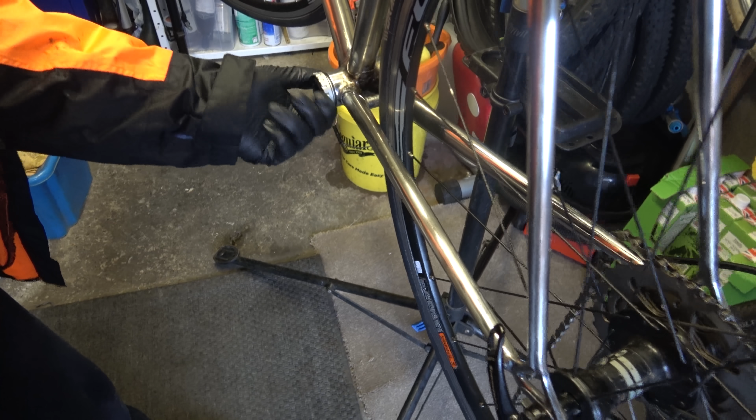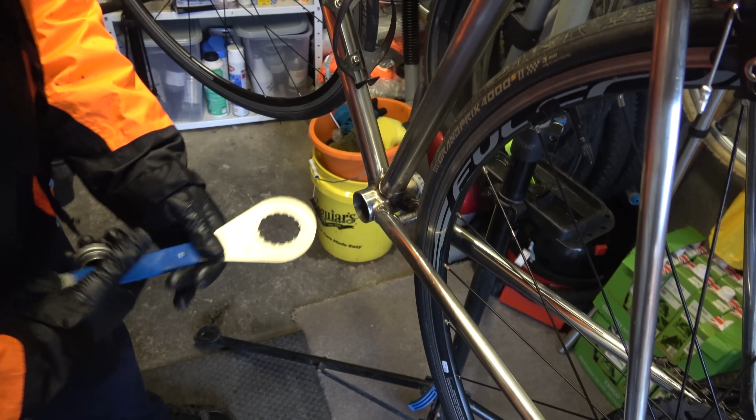We are removing the old bottom bracket on this rather nice Pinarello frame. I just bought it from eBay. A bloke from Italy sent me it. It took 3 weeks to get here because of the COVID restrictions. Oh dear. And that was £340 just for the frame, and I've just built it up to 105 because that's all I had. I stripped a mountain bike, took the bars and everything off that and put it all on here. Just to get it going, you know.

I know it should have Campagnolo, but I prefer Shimano anyway, because the bits are more accessible, you know what I mean? Yeah, I think the way that I look at Shimano is it's been engineered, it's almost robotic, whereas Campag is more a piece of art rather than engineering. But there we go. Anyway, I don't know where the heck I got these bearings from. They're just in my bag of bits.

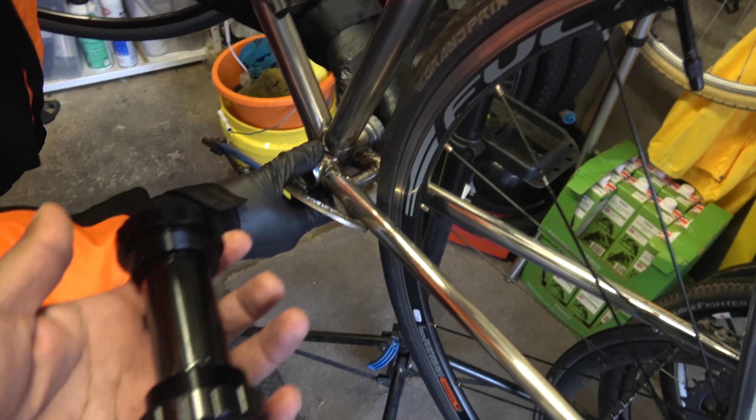So on an Italian bottom bracket, both sides are right-hand thread. That's right. So in theory, it doesn't actually matter which way you put this in. Do you want me to slide her in? Well, if you pull that out, there's two halves to this, which is a tight fit. So I'll put that on the other side. So you might have to thread it like half a turn. There is grease on them threads. Okay. I don't want to cross thread them. Is it in?

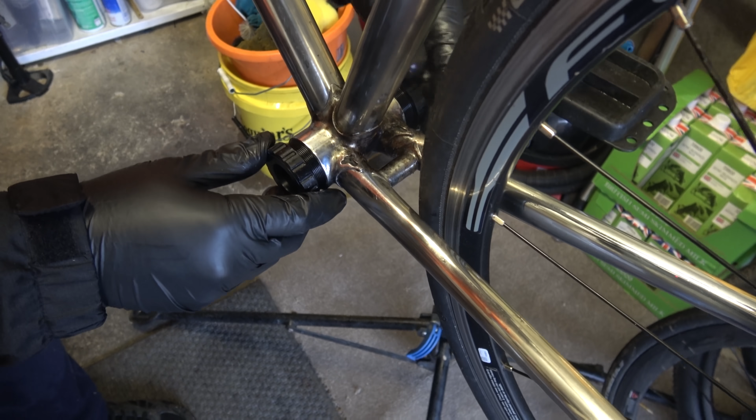Yeah. Which way did I go on that side? Clockwise. Let me just try it on this side. Does it matter? Alright, don't screw that in all the way. Put the other end in, because as you tighten it... So that's go that way, yeah? That one needs to go the other way. Yeah, that's got it. So it doesn't actually matter which side you put these in. Screw them together, it should just tighten up. It'll get tight as the sleeves cross. Yeah, it's tight now. Okay.

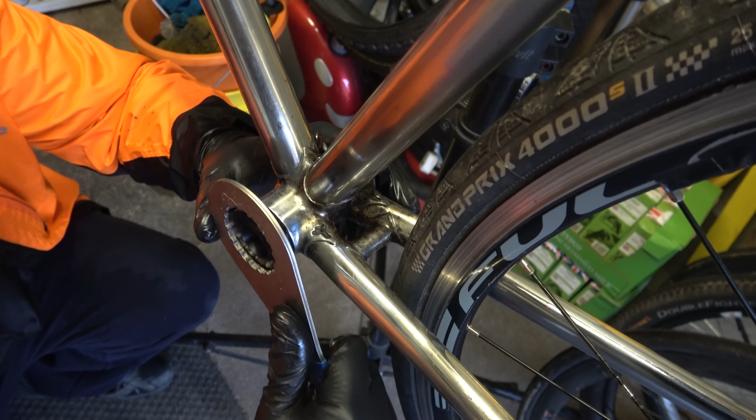And then you might just have to stop and then tighten this end. Ooh. So just have to give it a go. Might have to slacken the other end off. How's it going? Okay. So once it's in, that's lining it up. Why wouldn't you use a spacer then? Because if you've got the spacer on, you move the bearing to the wrong place, and the number of threads that engage won't be that high. Well, I don't think that axle will work then, will it? I'll take it away and have a look.

But my Colnago, the bottom bracket on that, it's just like a normal. It's Italian thread, but it's a different shell width, if you know what I mean. Yeah. That's why I thought, well. Okay, you're getting up to the near to the point where... That's nip that. And then just nip that off. Did I go that one way? Is it towards the back? Towards upwards. No, other way. That's it. Yeah, so that's why I thought I'd just get the same bottom bracket, because it's Italian.

That's going out, that's the wrong way. Oh, sorry. Wrong way, Mr. Hambini. Clockwise. It's because it's back to front. Yeah. So just for clarity, for viewers, it's clockwise both ends. Might help if you stand on the right side of the bike. Yeah, that might help. And that's it. I think just nip it. Yeah, don't want to do too much on it. No, well, that's a little nip there.

The only thing with this is you're better off when you put this on to put a bit of thread lock or something like that. It has got grease in. Yeah, the thread lock would be on that side, would need it more than that side because it might unwind itself. Because it's the opposite thread. Yeah, like I say. So once that's done, we just need to put the crank in.

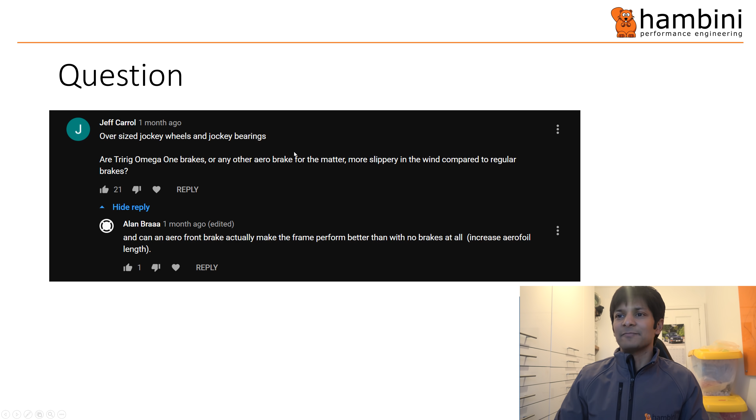Right, the first question came from Jeff. Did you see that? Did you fucking see that? In fact, is my pen working? Fuck, where's the pen? Shit, where is the pen? Fuck. Right. Pen. Oh, fucking hell. Right, people actually get off on watching me be shit on PowerPoint. Anyway,

Jeff Carrol asked, are oversized jockey wheels and jockey bearings worth it? And are Tri-Rig Omega brakes or any other aero brake for that matter more slippery in the wind compared to regular brakes? And then Alan Braaa replied, can an aero front brake actually make the frame perform better than with no brakes at all? Increase aerofoil length. Right, so I'll answer those questions on the next page.

So, oversized jockey wheels and bearings. Now, I wouldn't say it's a hot topic, but one of the prime protagonists of this is Ceramic Speed. And they sort of go on about oversized jockey wheels reducing drag, and the gains from it. So I can really speak to you from my opinion on the bearing front.

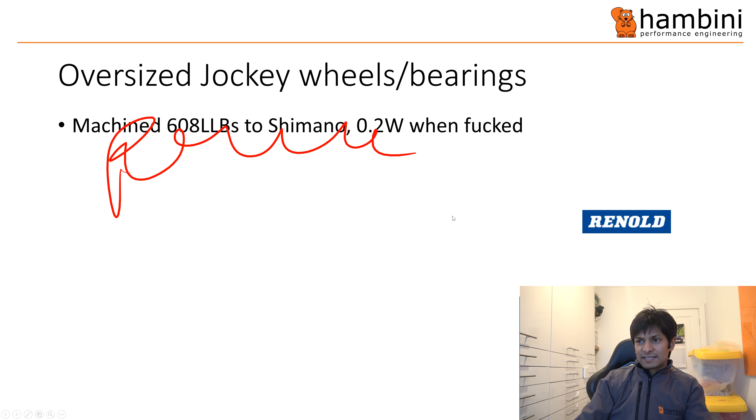So if you... fuck, I went to town with this PowerPoint. I've just defaced that. Someone said it was Control E to get rid of everything. Oh fucking hell, yeah. Control P for the pen. Yes, I remembered that. Might help that I put a piece of paper below with all that shit on, but anyway, with those shortcuts, which I forgot to read earlier on.

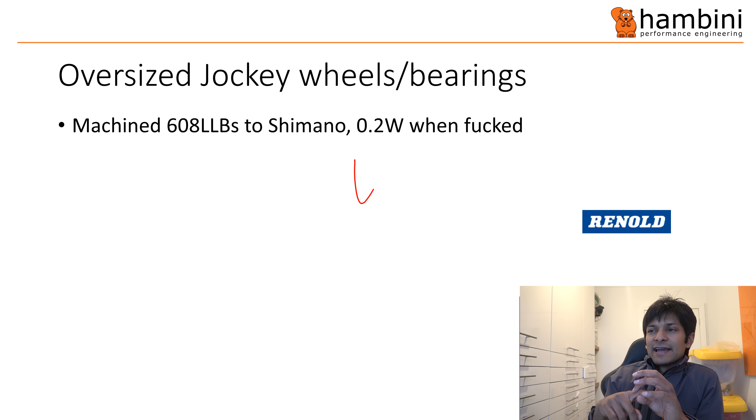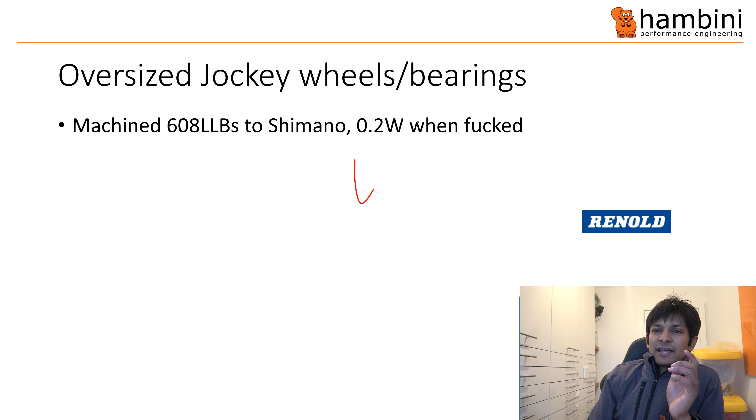Right, if you fit a set of 608 LLBs by NTN into Shimano jockey wheels, you will save about 0.2 watts when those bearings are fucked. Now, I've never done it on a brand new set, so you probably get maybe half that. So the saving will be 0.1 watts. That is just the bearing drag. Now, if you were to go to a Ceramic Speed oversized pulley wheel, then you are into what is known as chain angle theorem. So if I draw, where's the pen?

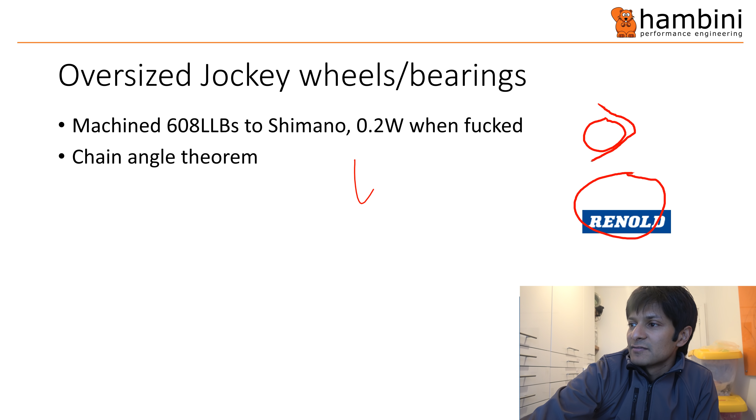If that's a normal wheel and that's an oversized wheel, the angle of the chain across the normal pulley wheel is that. The angle of the chain across the massive pulley wheel is that. So the overall total angle is the same, but the individual angle that the chain links have to pass through is diminished. And that apparently gives you a reduction in power.

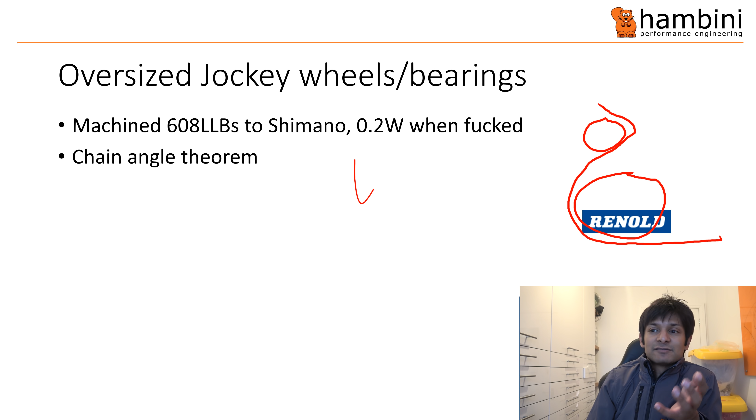Now, I don't know the basics behind this, so I went and emailed one of my mates who works at Renold. I think the guy was Swiss. Anyway, they're based in Manchester and they make chains. So they're quite a prominent chain manufacturer. So industrial usage, chains, Renold.

Now, he said, a 19 tooth versus a 12 tooth on a 1/2 inch pitch gives you 0.02 newton meters of torque reduction. And he also caveated that with, that's not measured, that's a calculated measurement. They've never actually done it, so there may be some error margin in there. That is, if you were pedaling at 80 RPM, I don't know, 53 tooth chainring, you will be looking at about 0.45 watts. So that is the drag reduction saving, 0.45 watts.

However, you also have the additional weight of the extra chain links, and the rear mech is further dangling into the wind. Now, whether it's more or less than 0.45 watts, I don't think it's ever been measured, but my opinion is it'll be more. So your net loss is worse because of the aero drag, the chain weight, all of that. It's small amounts, but it's small amounts that are costing you $500. So why do you want a small amount when it costs you that, and it possibly could make you slower? And I imagine the riding position will also have an effect on how much drag you have, and also your choice of rear wheel.

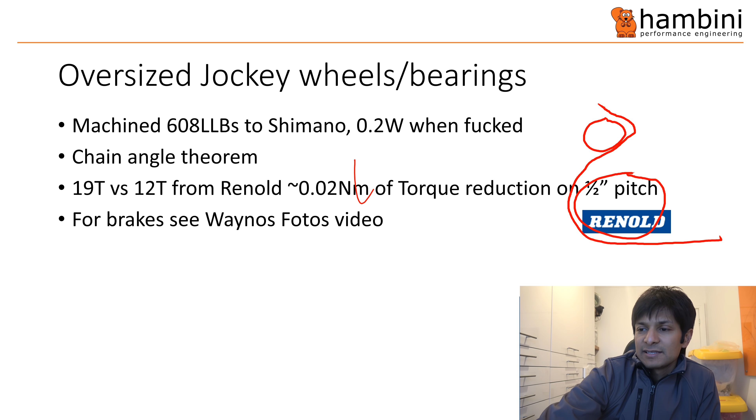Right, in terms of the brakes, if you haven't seen the video by Waynos Fotos, then go and have a look at that about disc brakes and rim brakes. Now, Alan's question was, does the brake increase the aerofoil length? So basically what he's saying is, if this is the front wheel, the fork comes up like that, and the brake sits sort of here, and then the frame comes round. Wow, that is a fucking good drawing. Right, the brake sits there. So he's saying, will that increase the length?

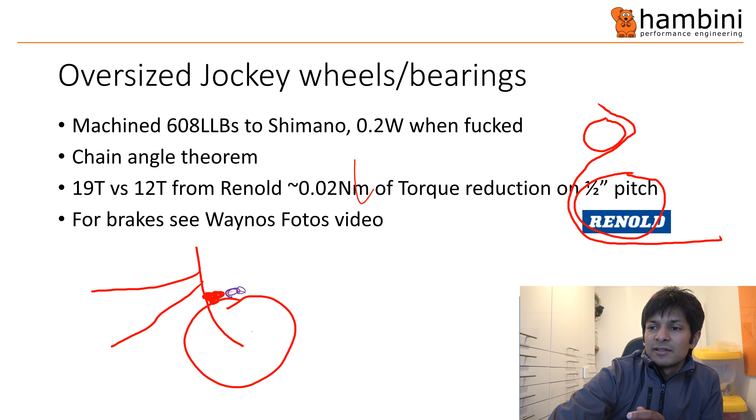Well, it will increase the length because you will have an addition to the fork, but the air in this region... Can I change the colour? Ink colour. Let's pick purple. The air coming off the top of the wheel is basically doing that. So you're in this region where the airflow hitting it is not uniform, it's swirling all over the place, and your gain is not going to be that high. Okay.

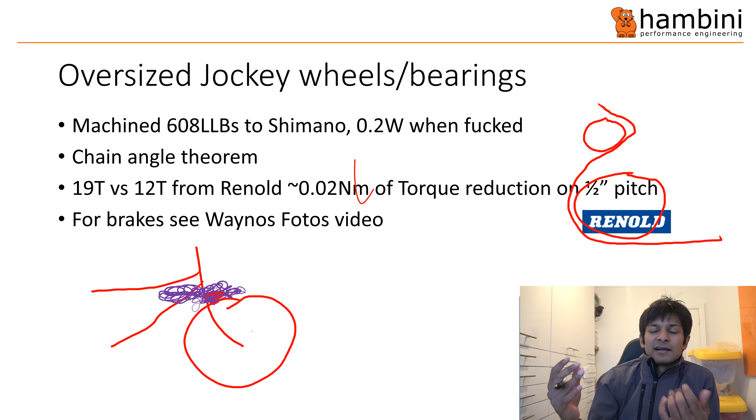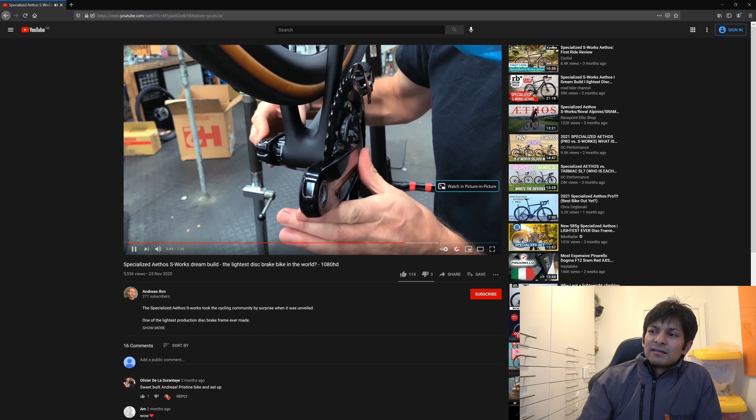This chap, Project Cycling, has sent me a link to this video. So if I click on that, will it work? Right, let's click on that. So this is a Specialized Aethos, I'm not quite sure. And this is the spin. So it only went round 2 clicks there. Now I guess his question was, is that any good or not? I guess the short answer is, it depends.

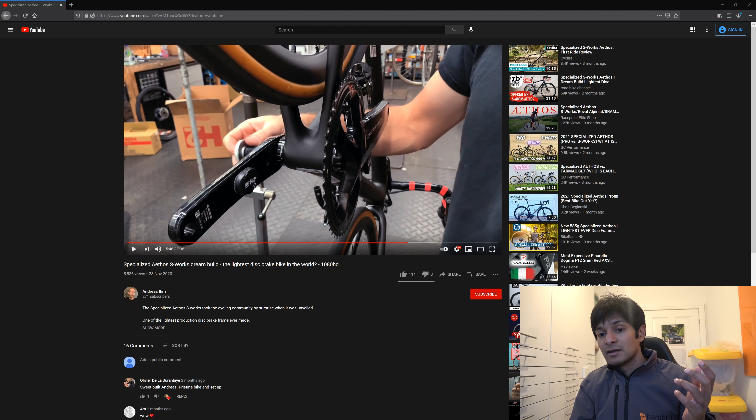Now looking at that, I would say that is a Shimano bottom bracket, and it's probably one of the newer type. The newer types have smaller bearings in. Now the smaller bearings are useful because they have less drag, but they're fully sealed. So if you get a fully sealed bearing, the drag on it is quite high. So I wouldn't say that was all that bad. Not as bad as the SRAM one from a couple of weeks ago, where that was shit, utter shit. Right, next.

Ooh, is Peak Torque a better engineer than Hambini? And I replied, well, I'm going to have to answer this for sure. Now, I wasn't quite sure how to go about proving that I was better than someone else without using swear words. So I had to rack my brains and that of my colleagues, and we came up with PT versus Hambini Top Trumps.

Now, if you're not familiar with what Top Trumps is, let me get the pen. Fuck. Control P. It's fucking written there. Shit. I'm a complete fucking bellend.

Right. Basically, when you were a little nipper, you used to have car X and car Y, let's call it a Porsche and a Ferrari, and there was all these stats on the cars, and then you had to get all the cards off your mate because you had the fastest car, you had the tallest car, you had the lightest car, all of these things.

And this is Top Trumps for engineers, by engineers. Right, so the first criteria, which was suggested by none other than my secretary, was: who is better looking? So I had to go and find 5 random women who are all above the age of consent to keep it all legal and all that shit, and below the age of 90 to make sure that they could see the 2 pictures, and ask them who was better looking.